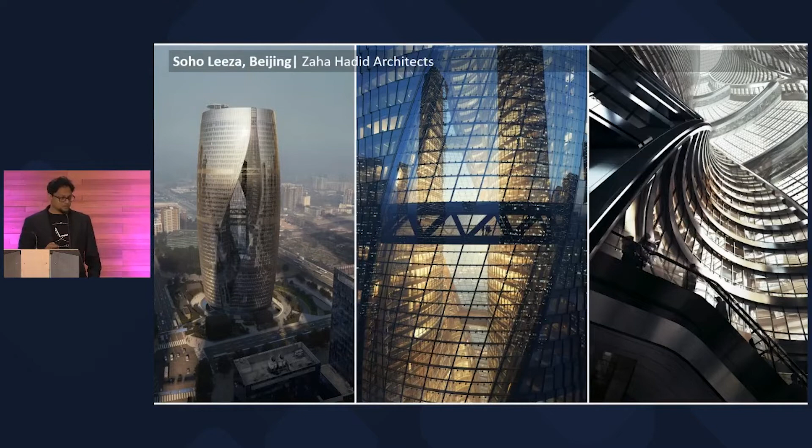So we produce these kinds of spaces, like an airport that got finished start to finish in about 4 years in Beijing in 2019, and in the same year we also completed this tower which has the world's tallest atrium. And so I was fortunate to see that, even though those buildings got completed in a very short time in 2019, the technological investment started already in the last decade, in 2009, 2010. So that's the perspective that I'm going to bring. What is the role of design in promoting technology, and bringing people together for a common purpose of creating something that is engaging for lots of people and lots of the users.

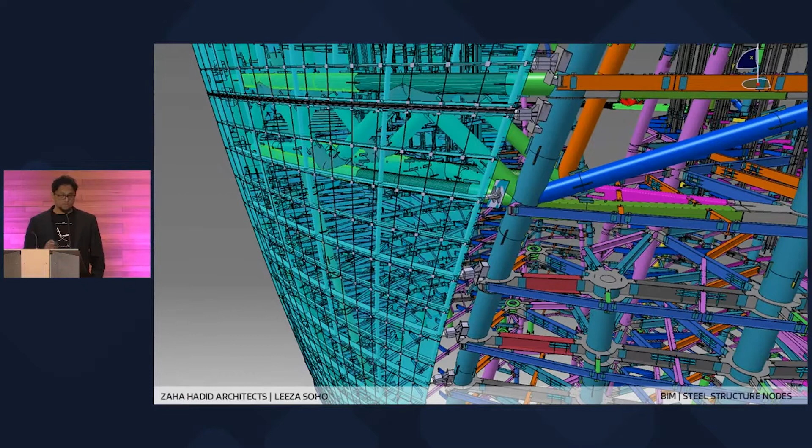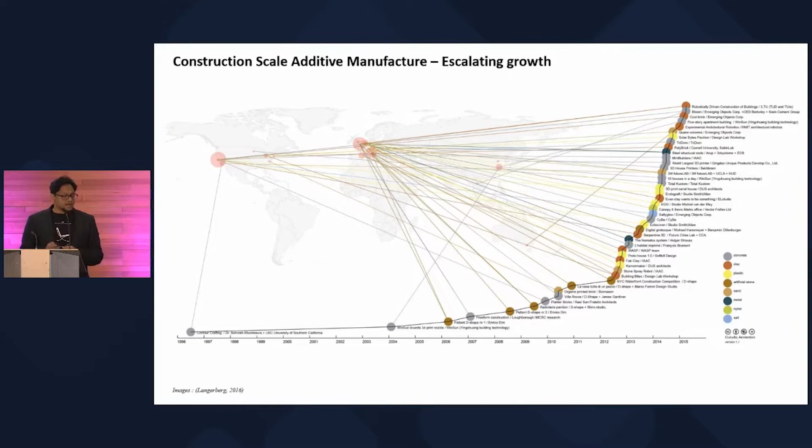So maybe I can start with a bit of blasphemy for a digital timber conference. I would like to propose a few things that digital timber could learn from digital concrete. What are those things? So concrete in general has similar issues as timber. Outside of the sustainability argument, how do you promote design tooling that can support some of these ambitions? They do have a committee called Digital Concrete. And there's been extraordinary growth in interest in 3D concrete printing in the last decade, particularly in the last 6 or 7 years. But like timber, they also lack a focus on the design parts.

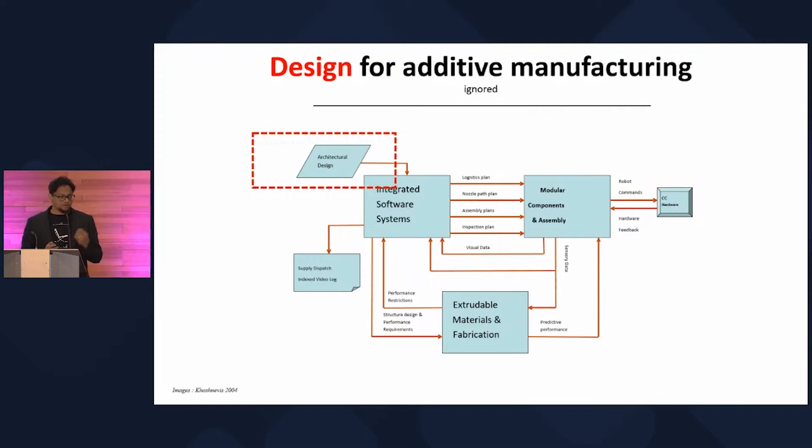Almost exclusively, all of the interest, all of the research funding, all of the talents are being poured into material engineering, hardware engineering, rightfully so, for almost 3 decades. And of course, architectural design is relegated into the corner. And I would say there's significant benefits to not ignoring design. One of the main things is that we can discover traditional wisdoms. Here we discovered that we can incorporate things from historic masonry, which are very much aligned with concrete, because concrete is a material that wants to be used as an artificial stone. It is compression dominant, which is almost exactly like brick or stone.

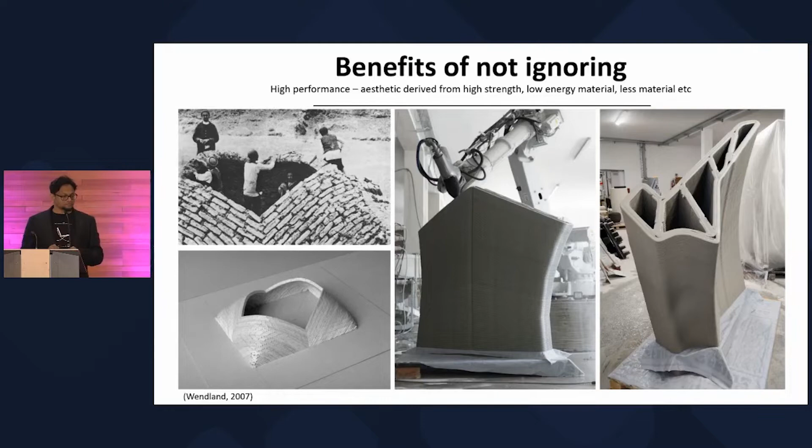And also what we learned from masonry is curvature is beneficial, particularly a certain kind of curvature, these kinds of compression geometries. And secondly, aligning material in these geometric patterns, like in the Nubian vaults, can be closely adapted for 3D concrete printing. That's why you would see these layers of concrete are not horizontal, they're aligned with the force flow. And so we created this with Block Research Group, where I'm doing my PhD, and Zaha Hadid Architects, with Incremental 3D, which is a fabrication startup in Austria with maybe 3 or 4 people and just 2 robots, alongside Holcim material engineering. Start to finish, this project was about 6 months, built to code and passed through all the engineering requirements of building in Venice, which is an island.

And so we also were able to demonstrate that with the confluence of these 3 disciplines and designing geometry that is appropriate for the material, we can go a long way to achieve some of the sustainable development goals that digital concrete set itself out to, which is to reduce the amount of material, design repair-friendly footbridges and infrastructure.

We can also reuse material because it is entirely dry assembled. There's no glue or mortar, so it can be disassembled and crushed easily, which has already happened. And it's also very recycle friendly because you don't have to separate the steel from the concrete and downcycle concrete. You can actually upcycle it, and so on and so on.

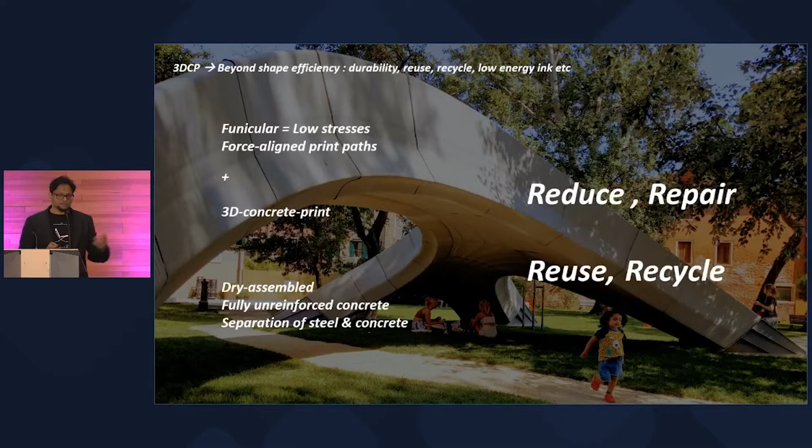So the key to all of that is that it is a digital material. And what do we mean by digital material, or why should we even care? Cynically, because software is easier to scale than hardware. But more importantly, because material is getting scarce.

Even timber is scarce. So any material industry, like the concrete industry, is waking up to the fact that it should not be a volume business. Your profit should not rely on selling large volumes of material, which is what the concrete business is currently. And so Holcim has recognized that, and they want to turn that into a value business, which means you need to attach it to software, right?

Which is a kind of Tesla model, like they're not selling cars, they're selling a computer, which can be upgraded and so on. So it's that kind of sense that we want to bring to digital materials.

So what do we mean by digital material? It is digital design and manufacturing of shapes which are informed by material properties, which are material appropriate, and incorporates a certain structural logic and incorporates manufacturing and construction. So obviously it is closely aligned with DfMA, or digital design for manufacturing and assembly. So I want to focus on the design part.

And how do I keep? I think it's not working.

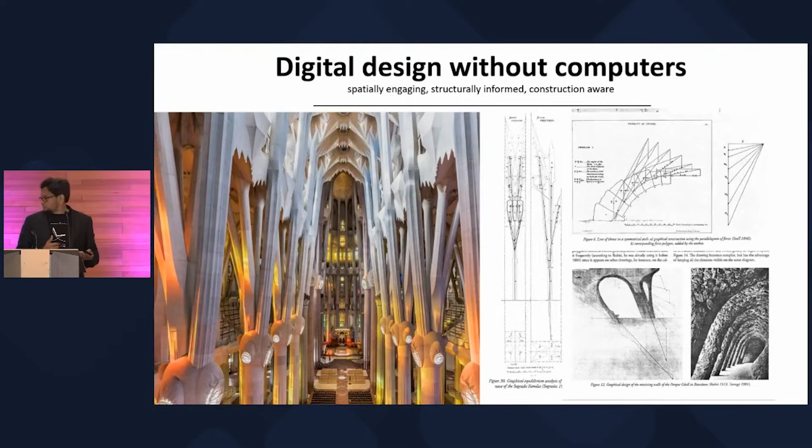And at the same time it is fully engineered already at the time of design. He has considered how to assemble the stone, how to cut the stone, and so on. And at the same time, fully inheriting a bunch of things that society at that time had developed, including how to lay out, how to draw these shapes in the first place, and also how to construct it. So there were codified procedures on how to cut the timber for the formwork, and the stone for the actual structure.

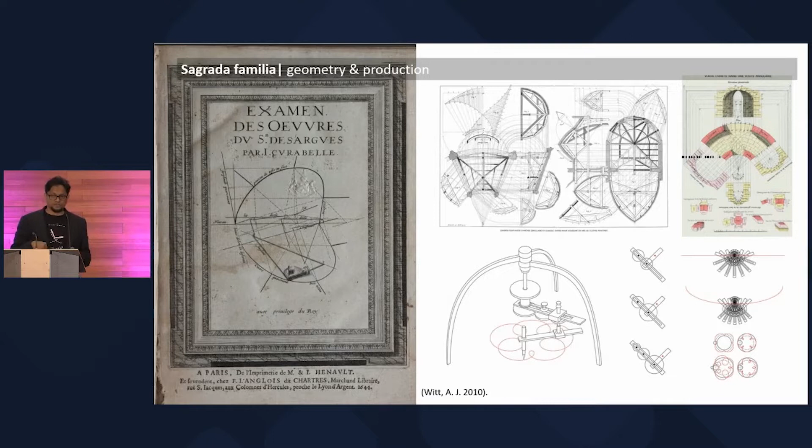And so on. And the instrumentation, all the instruments at the bottom, was available; it was also codified in that sense. So we've been trying to adopt similar principles with computation: how do you design the right shape for a given material and given structural logic.

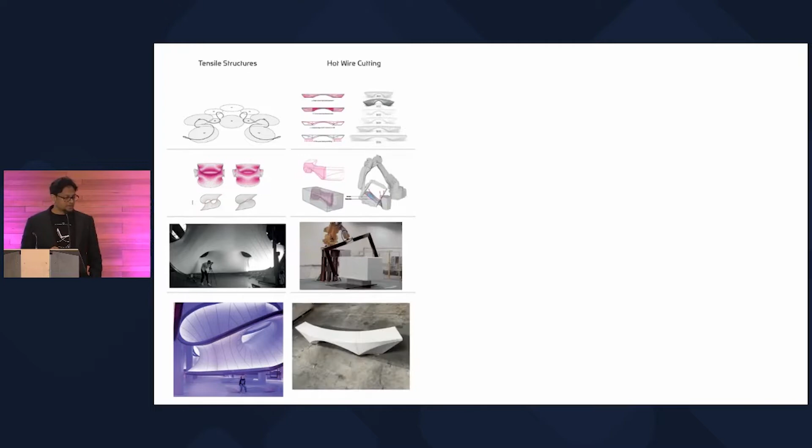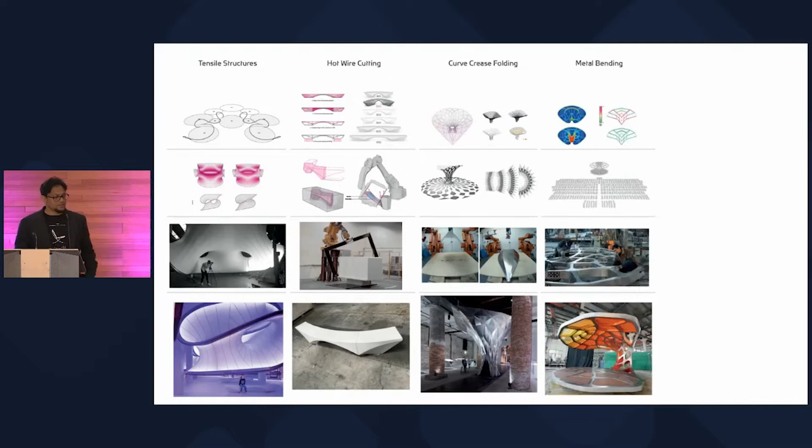And so we've explored that with fabric. We explored that with robotic hot wire cutting and ruled surfaces. We explored that with curved crease origami, using robots to bend metal and sheet metal bending and so on, and also 3D printing, etc.

So for the first decade of my time at Zaha, we built a bunch of prototypes like this, for which I'm still eternally grateful that Zaha was able to support such activity by attracting all the right people. And funding, of course. And as a consequence, in a very short time after her passing away, we were able to contribute to a large number of projects. 2 of these are photographs, and the top 2 rows are on their way to being photographs. And so that's the benefit of a digital material, because it is genuinely scalable.

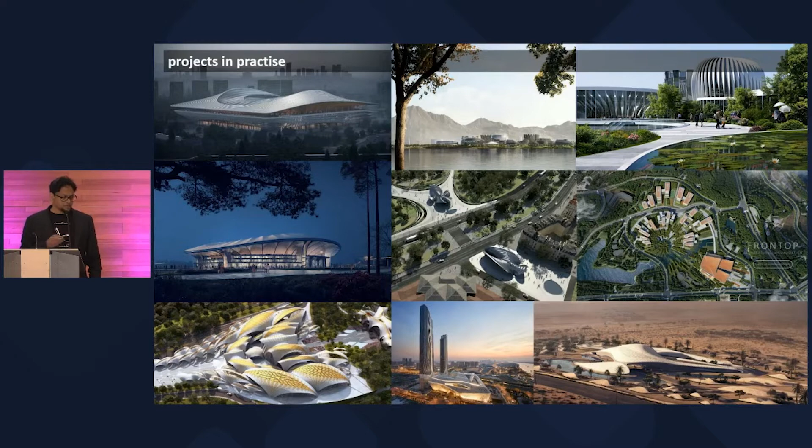We are still a small team of 20 compared to the office of 500. But we contribute to a large number of projects in a year. So how do we digitalize the material? By now, I hope it is clear that we shouldn't question why we should digitalize, but we should think about how, and how long, and with who, and so on.

All right, so how do we digitalize the material? We should build design research. What do I mean by that? We should nurture ideas with students. We should shove aspirational images down every client's throat. We should delve into the history. We should propose some social use value, and most certainly build an appealing pilot project, because you're never coming back from an unappealing pilot project.

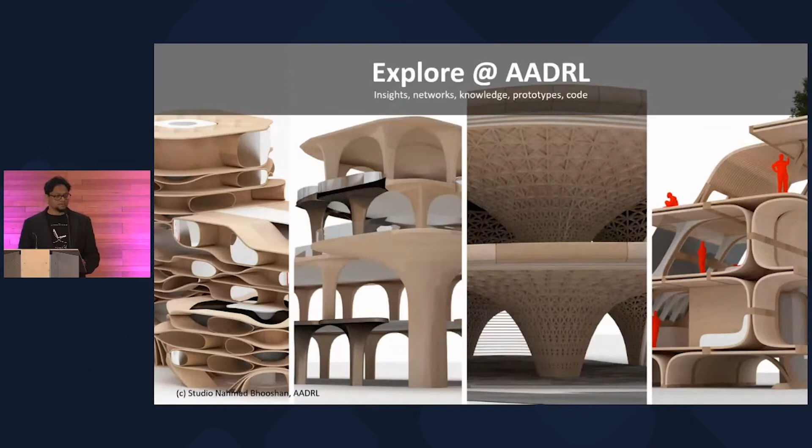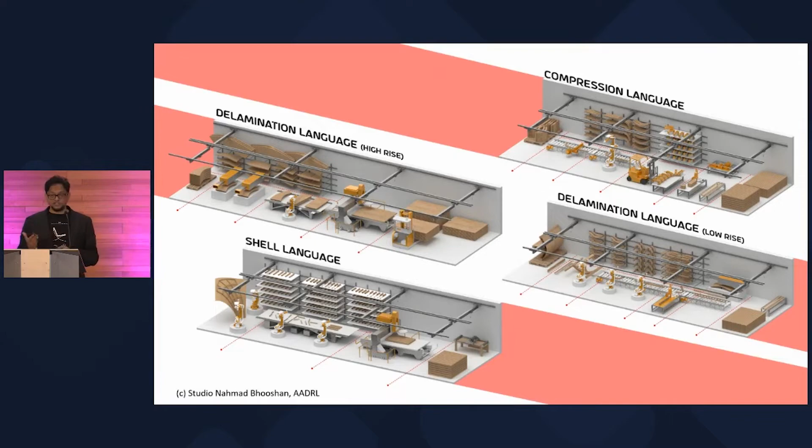So yeah, we've been doing that with Design Research Lab, working with a lot of graduate students, exploring timber. What kind of language does it afford? What kind of tectonic capabilities does it afford? And how is that related to the manufacturing capacities? Does the layout of the factory actually affect the aesthetic? Which machines you buy, does that affect the aesthetic, and so on?

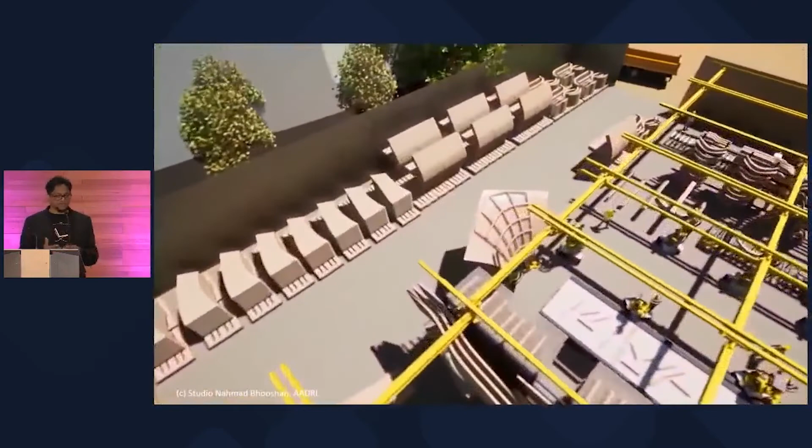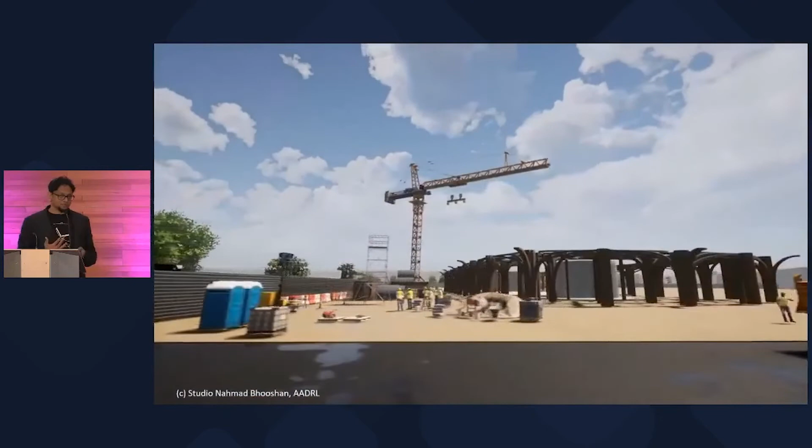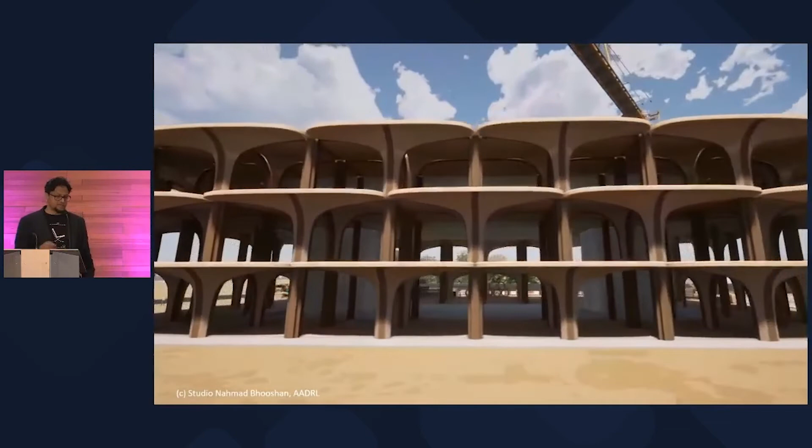And we are kind of forcing students to investigate that relationship between the layout of the assembly line and what comes out. Of course, this is not as professional as a well-researched project, but by nurturing blue sky ideas, getting people to think about these processes which architects normally wouldn't, we are beginning to encourage a lot of new talent that comes into studios like ours, or starts their own practice, to start thinking about the genuine opportunities for developing design with the corresponding technology.

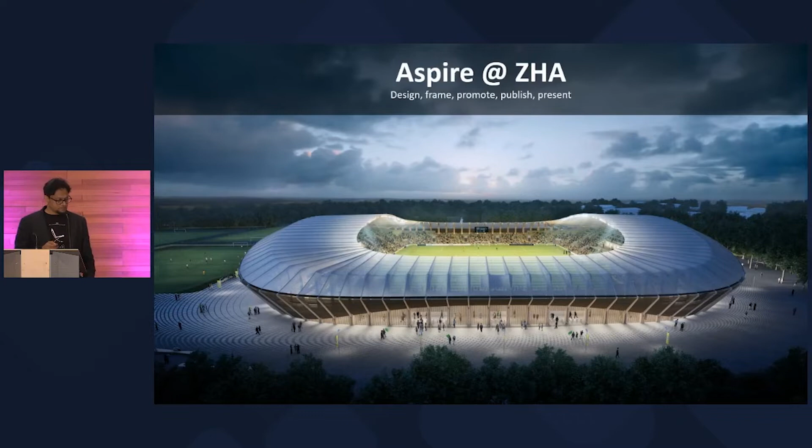And we've also been proposing with all of these competitions that we're doing, like this timber-only stadium in the UK, which we won, and it has been stuck in planning for a while. But we continue to do that. Every project, we try to propose aspirational buildings that the clients actually want to build, and this is a similar project in Latin America. This is in Southeast Asia, and so on.

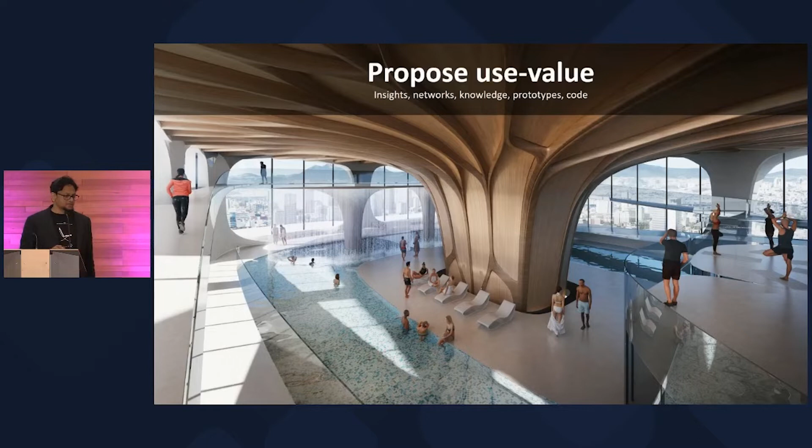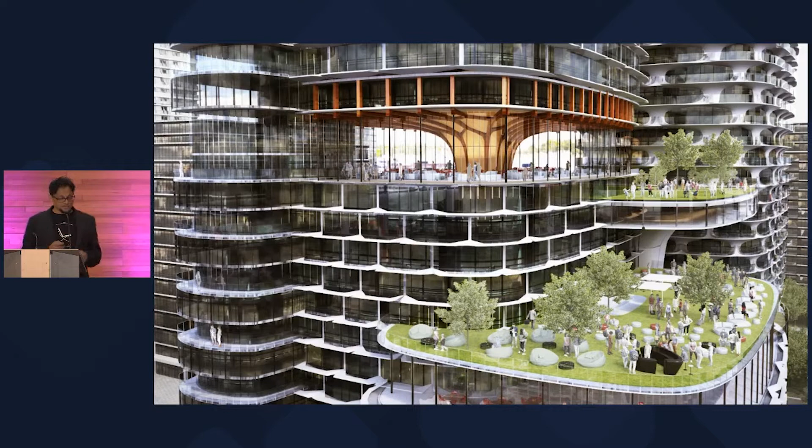So we've been trying to not only propose, but explore what is the value of specific materials and specific construction types in a building. So here we are proposing a combination of modular construction with standard steel chassis, but we are also suggesting that for high value spaces like co-living, co-working areas, where there's a lot of people, we should use timber, which is warm, very human and touch friendly, and the color is very engaging. So we propose this kind of mix of different material systems as well.

We've also been working with a lot of researchers, collaborators, engineers. For example, at the ETH, where, as I said, I'm doing my PhD, with other timber suppliers in the region. And also considering robotic assembly, what opportunities there are to convert that technical quality into an aesthetic.

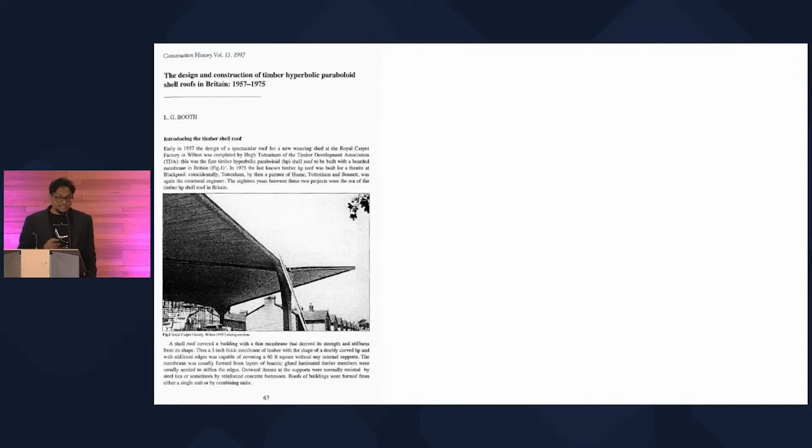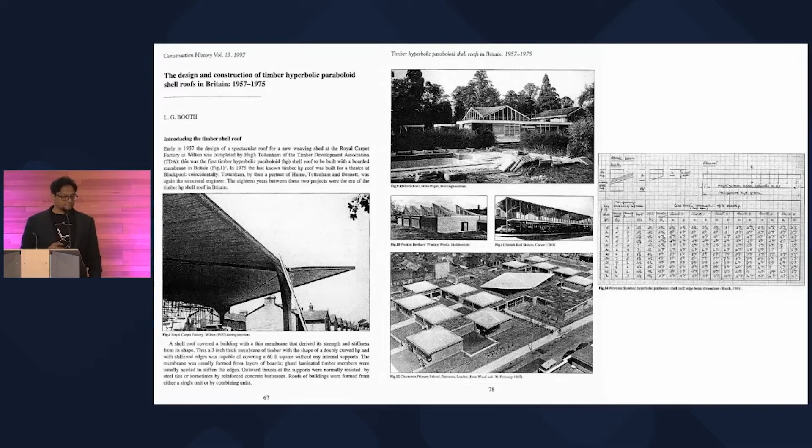And we've also been looking at the history of timber construction, particularly in the UK, why you don't see any timber buildings at all in the UK now, even though there was a prolific ecosystem of timber construction in a certain period. And it just fell out of fashion, even though there was deep knowledge available. And we realized that maybe timber's real competitor was not actually concrete, it was steel. And perhaps there could be a design-motivated reason to bring back and work with timber again.

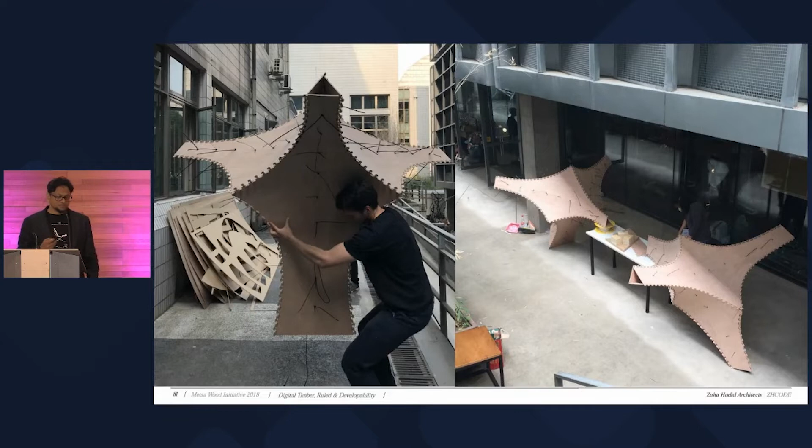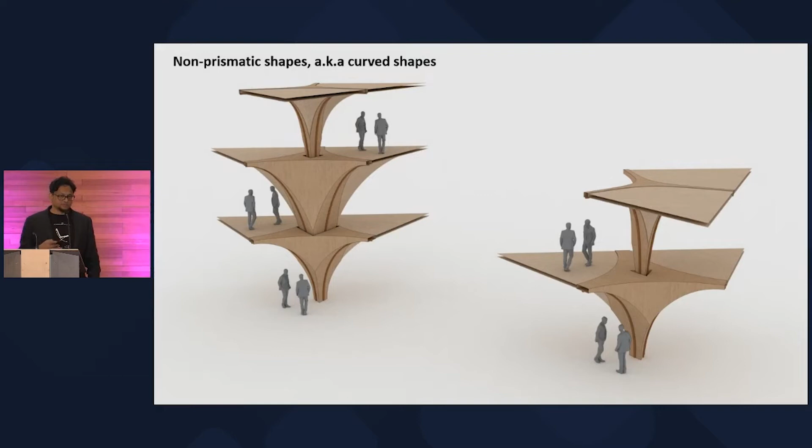And so we've also been developing these kinds of experiments, like how can we do rolled timber or developable sheets of plywood into formwork, and how that can actually lend itself to design experimentation and genuine impact on the spatial quality of spaces that we design.

We've also been looking at some of the scientific literature on how to design with timber, and this is work from SOM architects who discovered a few interesting things from way back at the start of the 20th century, that geometry is essentially required to be economical with material. So if you want to minimize the amount of material, to be sustainable in that sense, it is all a function of designing the right shape. And this idea is perhaps very evident in the classic Michell trusses and so on.

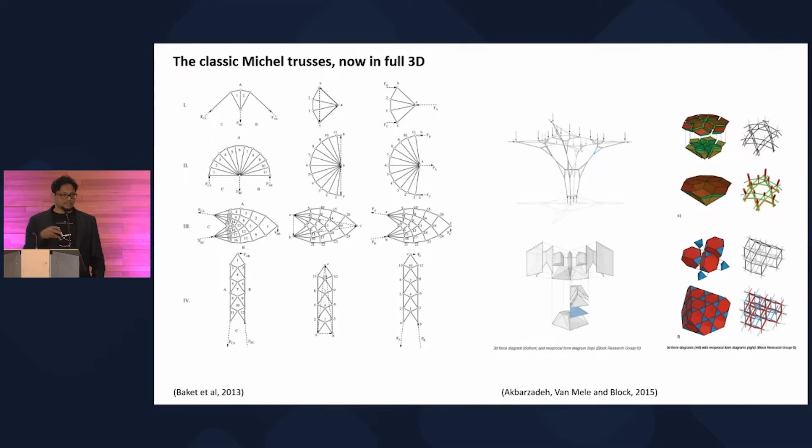And a colleague of mine at ETH has extended this knowledge from the 20th century to fully 3D and fully designer compatible, because it's very visual. And that's why we are very engaged with this kind of research, which is called graphic statics. Because it is graphical, because it is visual, it is a common language that can unite not only designers but also architects and manufacturers.

And that allows us to propose, already during the competition stage, these kinds of structures like the lenticular truss that you see there. So it's not only the focus on engineering, but also the spatial quality, and also how we will construct it and so on.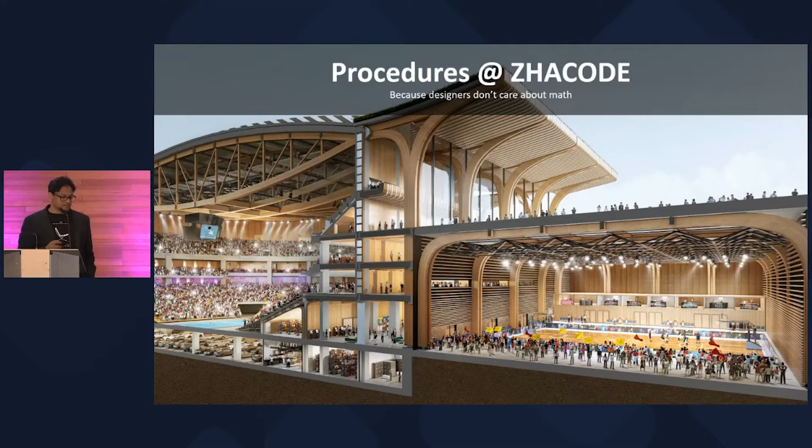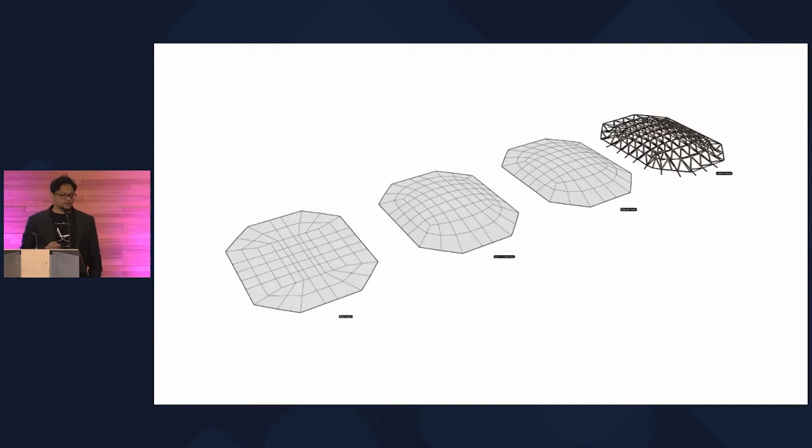And that is also informed by the fact that designers don't really care for numerical analysis and so on. They want to know how to intuitively design these complex shapes. And so we also develop these simple procedures that are designer compatible, but they're definitely informed by some of the structural engineering logics and so on.

And lastly, I want to end with the key message I started with: all of this would not amount to anything unless we can develop an engaging pilot that genuinely shows the value of design to the end user and also the investor. And so that's what we've been doing for the last 4 years.

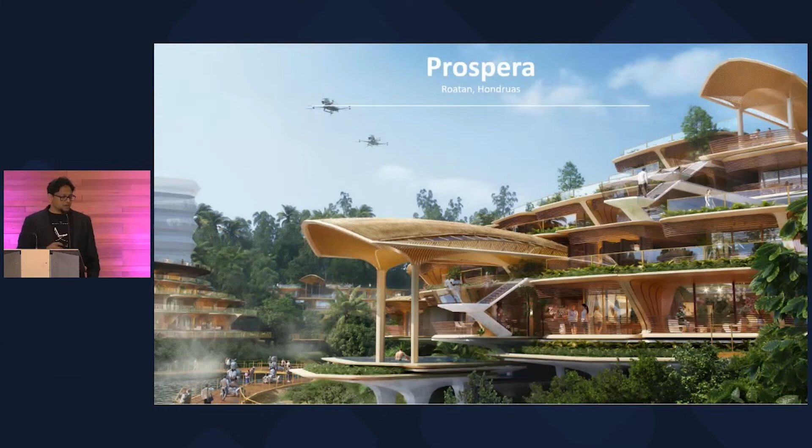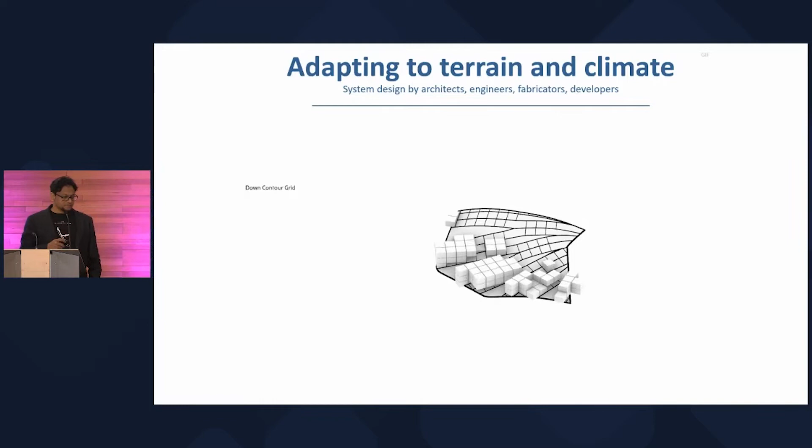We've been working with a startup city in Roatan in Honduras, where we are proposing a kind of high-density housing, a combination of modular timber on top of concrete podiums, the classic 3/1 or 5/1. But with a twist, where we're trying to develop design software which will adapt modular construction to the terrain and the climate of the region, and also the views that are on offer, because it is a beautiful island.

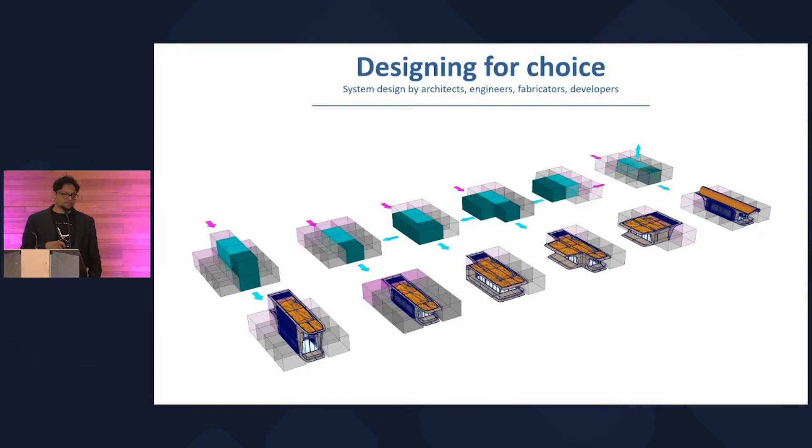And make all of these parameters available to the end buyer. And more importantly, we are also trying to design for choice, where users can pick these pixels, and based on which pixels are picked, we compute an option in real time. It's a kind of car configurator, but at the scale of a site. Let me go back.

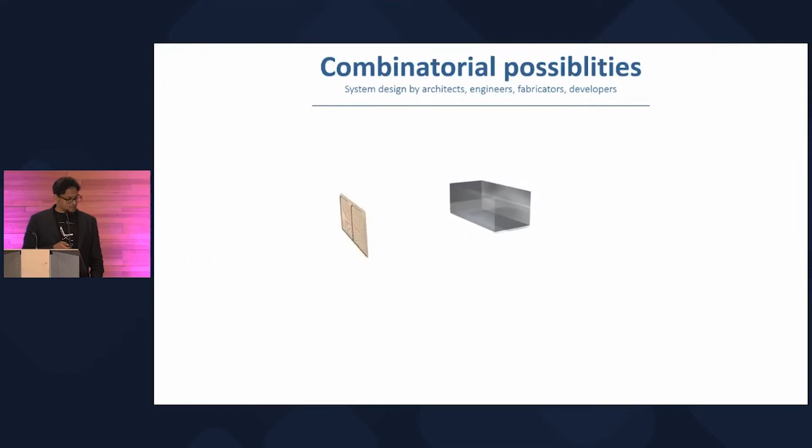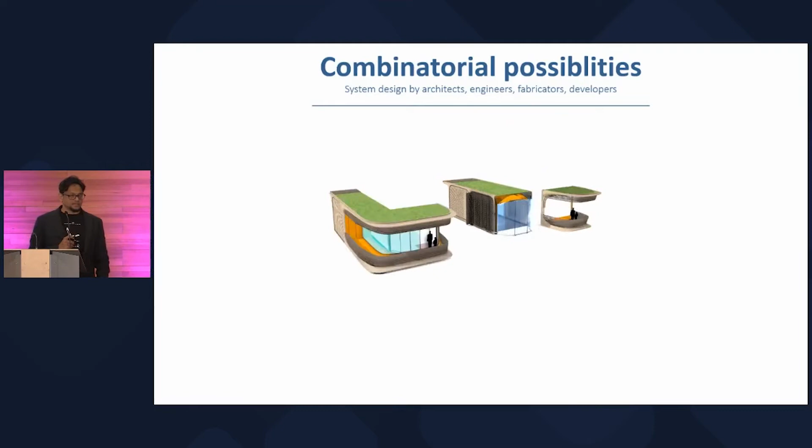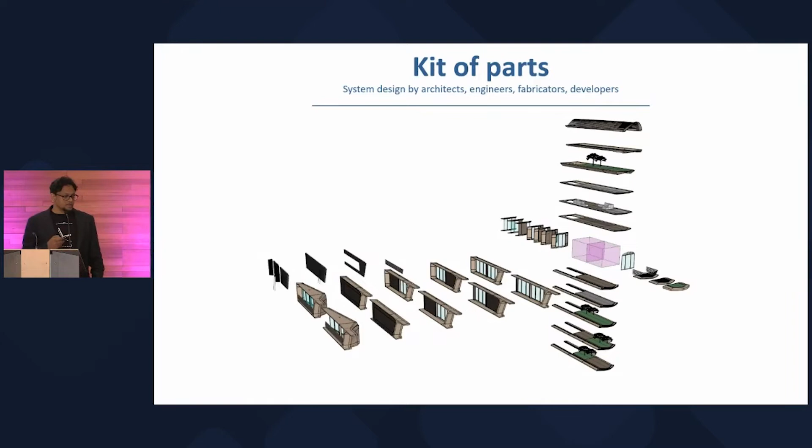Yeah. And some of the ideas of Google and Katerra and so on, where we have a combinatorial possibility between a standard kit of parts, also trying to design the kit of parts in such a way that there can be genuine surprise and it's not all monotonous. And trying to anticipate what the users might need for a single family house or a multi-family house. So we inherit a large number of the ideas of digital timber or mass timber, standard kit of parts, library of parts, which are already engineered.

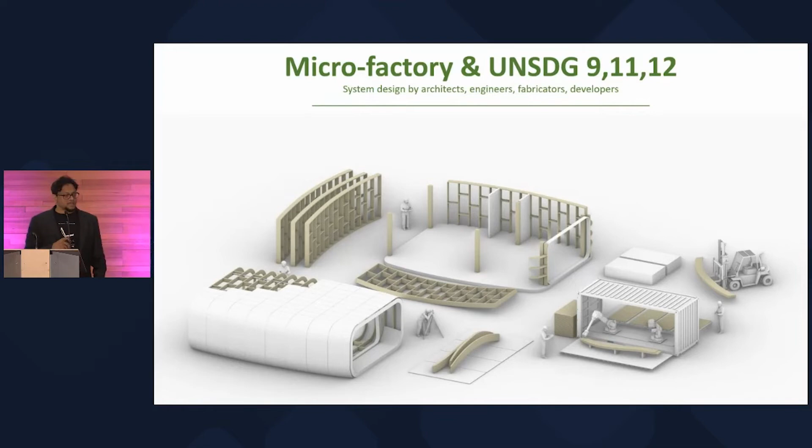One thing that we wanted to do differently on the island is to go with this idea of a micro factory as opposed to a gigafactory, whereby we start small and import just 1 or 2 robots and work with the local building trades and digitize them. So it's a low capital investment approach for the first 10, 15, 20 houses before we scale up. But already that is allowing us to incorporate all of this information of how raw material gets converted into a house into a so-called configurator, which we built using a game engine.

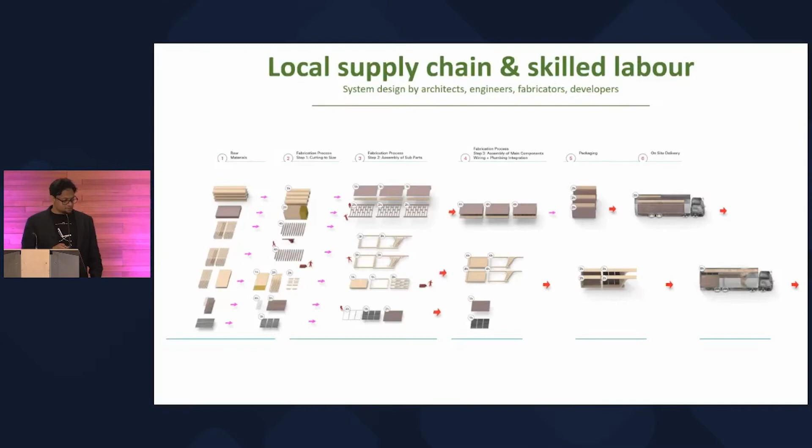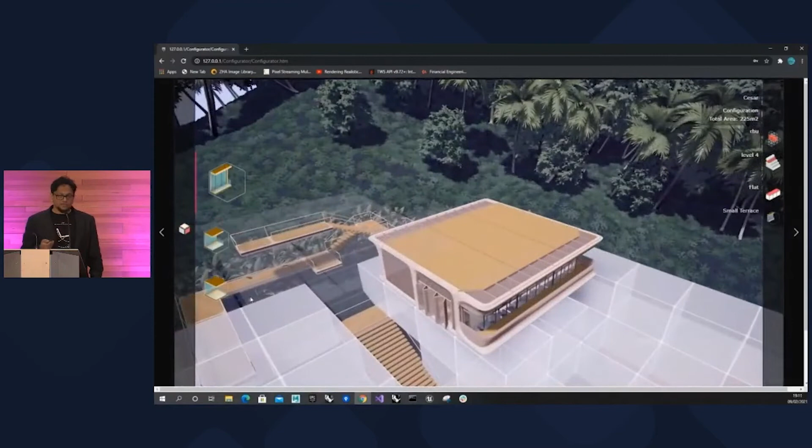Not a CAD platform, but the Unreal game engine, because it is gamifying one of the most important investments any family makes. And so it's trying to be as transparent as possible so that what they see is hopefully what they will get, as quickly as possible. But what's interesting is that they not only can customize their house and its interior, but they can also pick the site in 3D space.

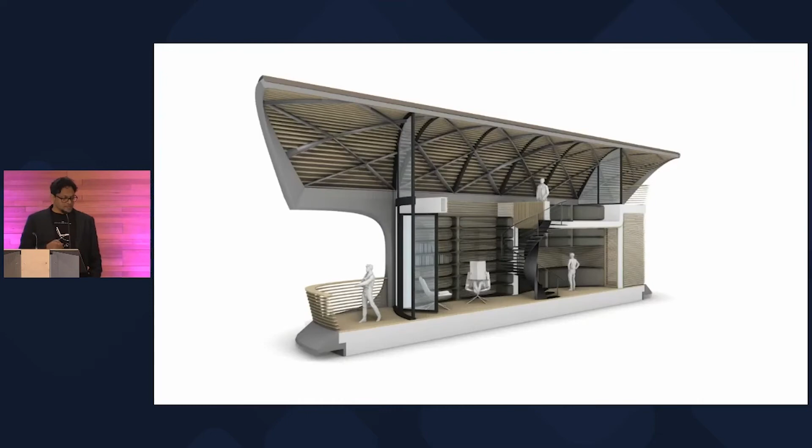And then we as architects come and try to negotiate or resolve conflicts between people who made the same choice. So that de-risks things for the buyer in the sense that it is transparent. So we are trying to gamify and make intuitive one of the most important financial decisions anybody can make. And the reason we're using a game engine is it's photorealistic, so it's more directly intuitive to the end buyer what they're getting.

And second, it's also de-risking it for the developer because they're assured buyers, and potentially you could also do dynamic pricing if more people are demanding a two-bedroom house versus a single-bedroom house. In this particular instance, we haven't because it's a pilot project. And also we already know which ones are more popular. You don't have to design 20 different types to the greatest detail and then find out that only 2 of them are popular.

So we're front-loading the process, and that de-risks things for architects and suppliers as well, because there is a definitive spec sheet that we can have. And more importantly, one of the key benefits we found was that by having this gamified approach, we can optimize things beyond the single unit. We can optimize at the level of the stack.

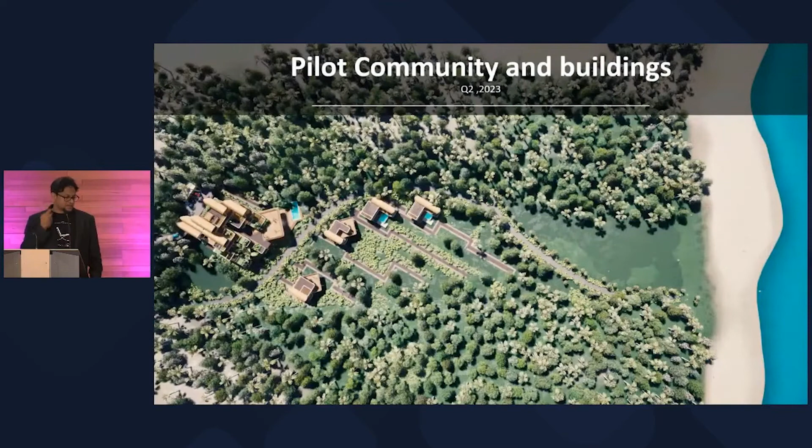For example, at the bottom, houses can have more structural material than the houses on the top, which can lead to significant material savings. So that's where we are at. We're hoping to finish this pilot project of 10 houses in summer of next year, and hopefully pave the way for a denser and more vibrant community.

And to conclude, digital timber: we're positing that the D in DfMA is always the bottleneck, and we should encourage as many architects and designers to participate and come up with new designs, because once you promote that, everything else follows, because the common visual geometrical language promotes collaborative problem solving.

It can then promote economical use of material. It can make durable construction possible, and so on. It can also return a vocational pride, something that is beginning to be very missing in the building industry.

And if we can learn anything from the automobile industry, I think it should be not about automation and not about the assembly line. It should be about creating engaging and responsible buildings. Engaging meaning that it is not only about high performance, but it is something that people want.

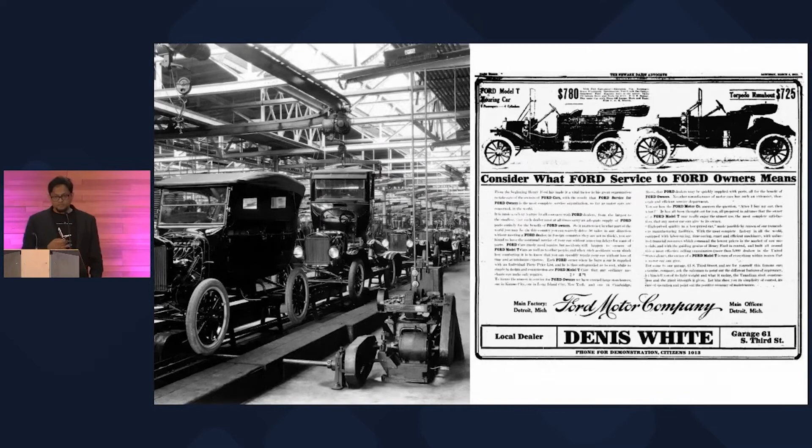So it's not about the assembly line as Ford made popular. Not only that, that is important, but also recognizing that the significant success of the car industry is positioning the car as singularly important to your lifestyle of the 20th century. So that's what we believe was the success of the car industry: they were able to bring these two things together, the assembly line, but also a significant lifestyle change that convinced a lot of governments and

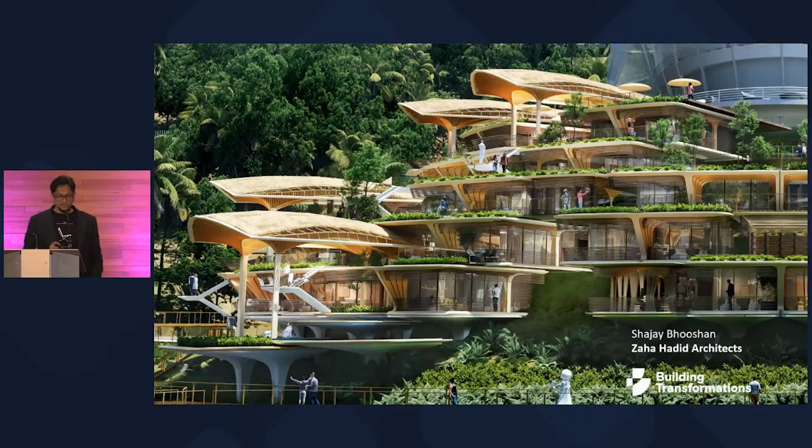people. And so we want to try and do that ground up, to position a responsible green lifestyle as important in the 21st century. So thank you for your attention, and I'm open to any questions.

So do we have any questions from the floor? Jerry? Any from online? Not right now. Okay.

I have to say, Shajay, that is probably the most stunning 5-over-1 configuration for a mid-rise residential project that I have ever seen. It really goes to show that design is absolutely what underpins everything. One question I have for you, though, is how do you get your clients to buy into your vision? These are pilot projects, they're research driven. Maybe you can just fill in some gaps for me there.

Yeah, I think it's an important thing to realize that for every project that gets built, we propose at least 20. And most of our work is not repeat clients who just come to us because we are Zaha Hadid Architects. We win our work by competing, and so every month we do at least 20 competitions in a firm of 500. So that means we are very optimized to experiment a lot, and so we are just increasing the probability that one of the clients is gonna want one of these.